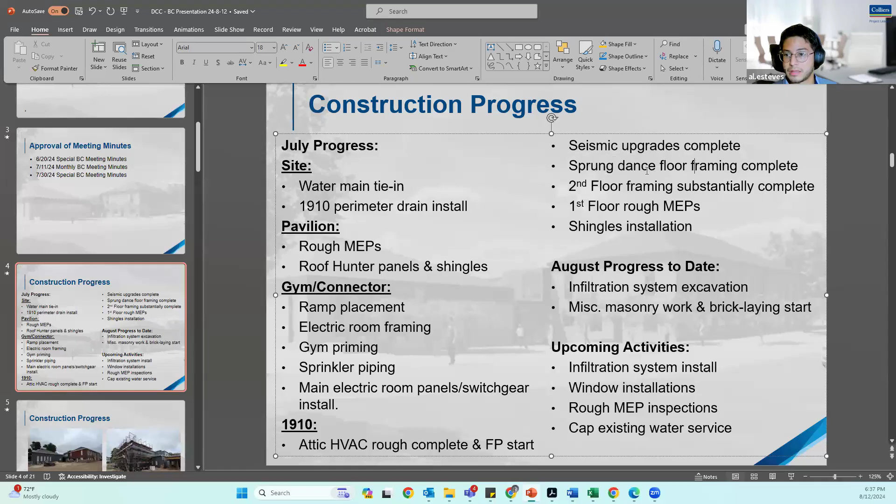A big milestone for the month of July was completing the seismic upgrades at the 1910 building. That opened up a lot of work with the floor framing and general framing and rough MEPs start. We completed the sprung dance floor framing during the month of July. Second floor framing is substantially complete at this point, and the first floor rough MEPs are also substantially complete. Shingles at the 1910 building are substantially complete as well. So a lot of progress in the month of July.

It is now the 12th, and since the end of the month, we've started excavation for the infiltration system. I actually saw that yesterday, and they have all of the piping installed, and it's getting backfilled. So that's going to be complete this week. And another big one is we're restarting the masonry work. Currently, they're working at the gym building, laying brick. Upcoming activities are, like I mentioned, completion of the infiltration system this week, window installations, MEP inspections, as well as capping the existing water service. Any questions on the progress?

Are we going to get into the overall schedule in a minute? We are. Okay, yes, thank you.

Okay, so looking at some photos, the picture on the left, this is taken last Tuesday, and you can see on the pavilion building the shingles, which are about 50% complete. And you can sort of see some of the repointing that picked up again on the 1910 building. As I mentioned, picture on the right at the gym building, they're starting back up with the brick. As you can see, all the brick is staged here. Right now, they're probably about 4 foot higher than was shown in this picture. So we had some progress since last Tuesday.

Going inside the pavilion building, towards the beginning of July, they started the ductwork up in the kitchen area, and that's now being completed. A picture on the right shows the installation of the ductwork as of last Tuesday. That's all complete now.

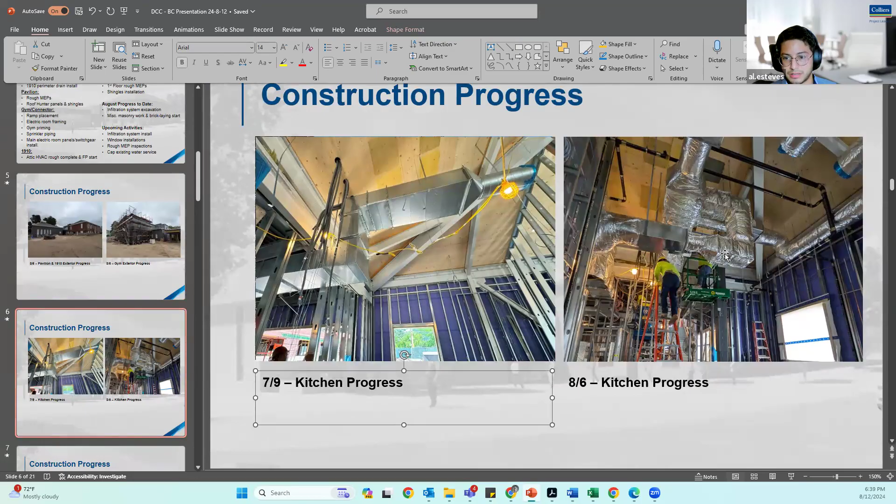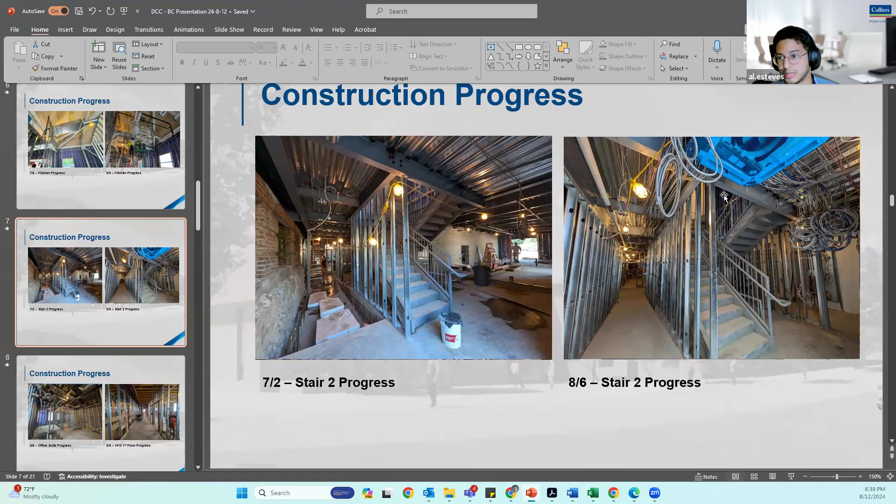Moving on to stair number 2. This is by the electric room. Picture on the left is what it looked like in the beginning of July. As you can see, the ramp had not been installed yet. Very little electrical wiring. And you can see in the picture on the right, ramp is in, framing is in. You can actually see a fan coil unit up at the top, a bunch of wiring to the right. And in the back, you can sort of see some of the panels installed in the electric room.

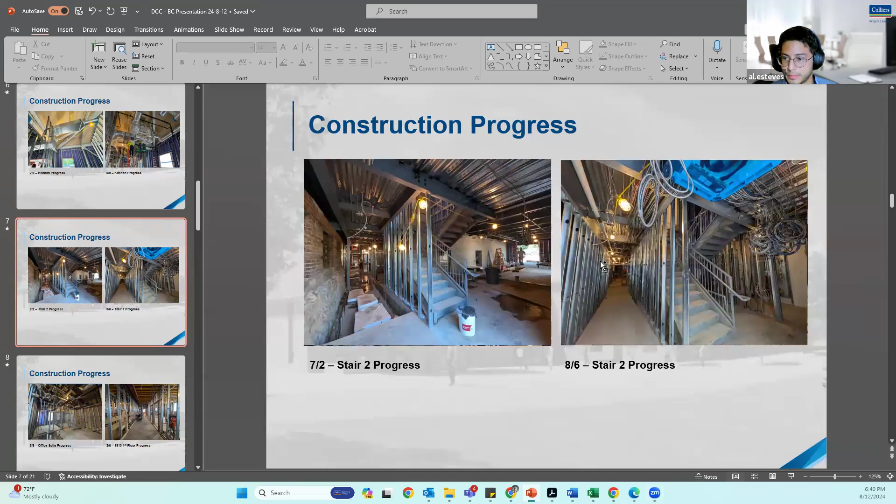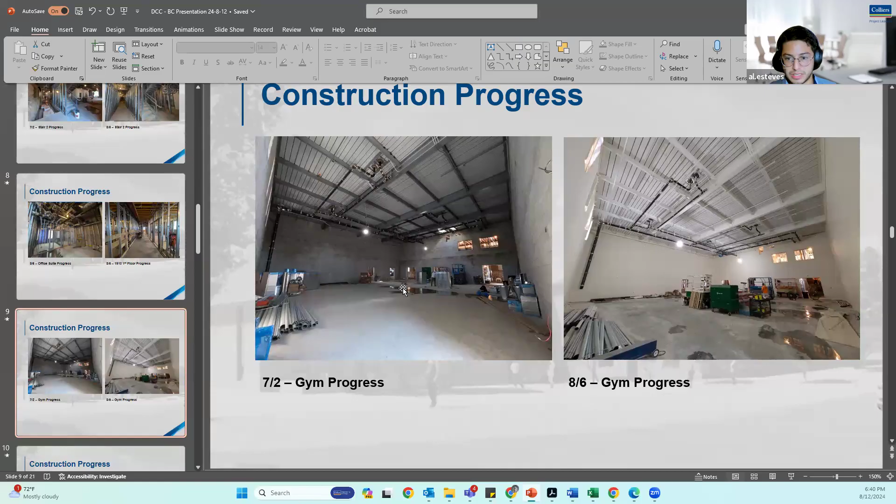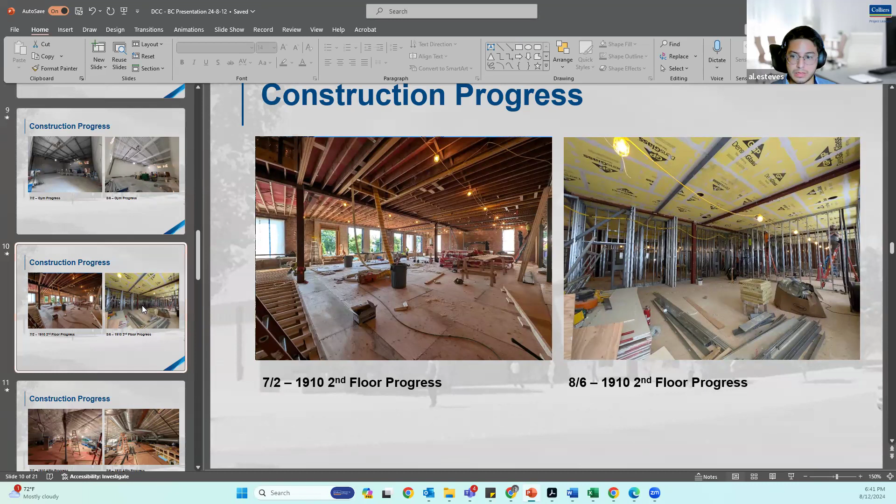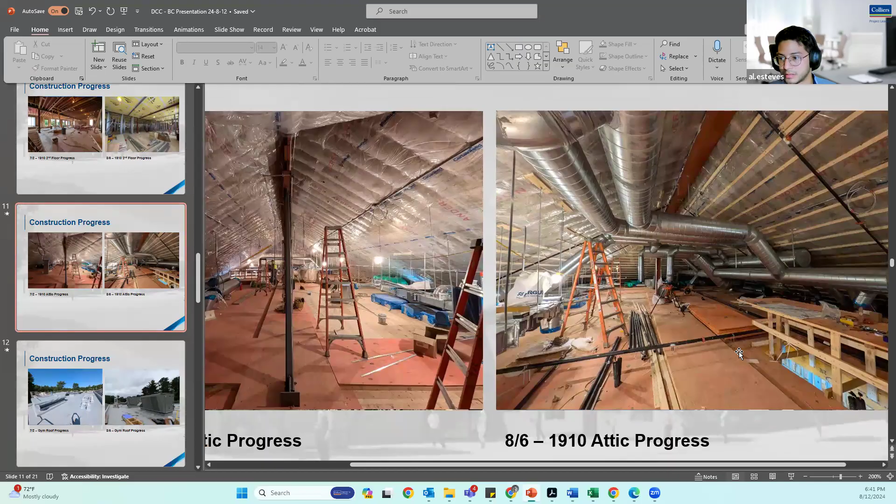Moving up to the attic of the 1910 building, picture on the left is the beginning of the month. You can see some of the ductwork and fan coil units had started to be hung here. And the picture on the right shows all of the round ductwork is in. You can see some of the strapping for the vapor retarder. And then you can see the sprinkler piping that is up and also laid on the floor. So that was ongoing as of last Tuesday.

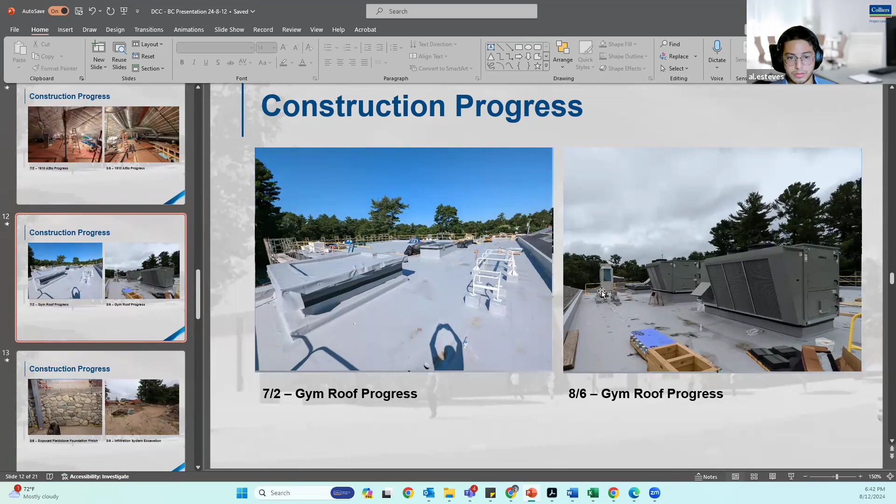Moving up to the roof of the gym, you can see that the rooftop units were installed. Those were inspected today by the town's third-party MEP commissioning agent. That's R.W. Sullivan. And then you can see another condensing unit here in the back.

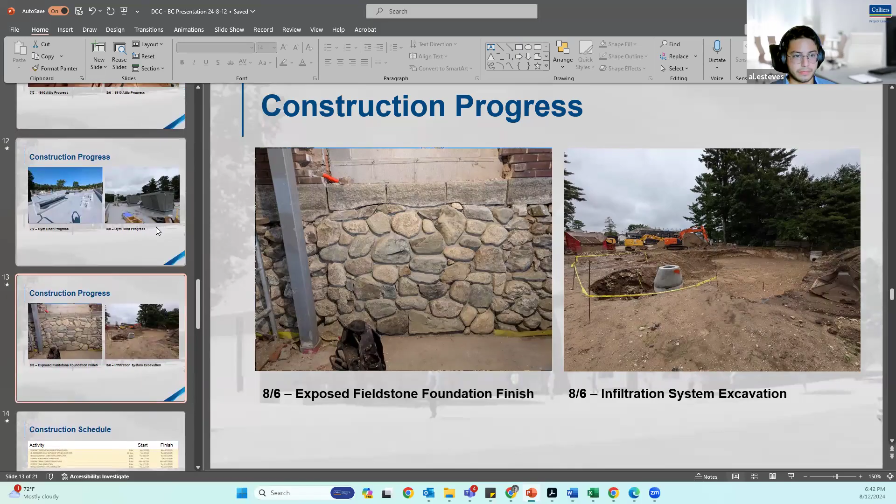Okay, moving on to the construction schedule, I do have a couple of updates on this. We received an updated construction schedule today that shows that the contractor is anticipating achieving substantial completion at the beginning of January of next year. So this is 3 months behind their current contractual substantial completion date, and it is about a month more than what they were showing in their last schedule, which was from May of this year.

Obviously, we'll continue to work with the town's legal counsel on this. I've already notified them about this updated schedule. And we were already withholding a total of $88,500 from the contractor until a formal delay claim and a corrective plan is provided.

Those have not been provided yet, so we continue to hold that amount. And essentially, because the contractor is now showing that they are more behind schedule than before, potentially this increases the amount that we can hold back from the contractor. This is something that I am working with town's legal counsel on. And again, the schedule, we just received it today. I haven't had a chance to go into it in detail, but these are the major milestones.

And you can see here in the middle where my cursor is, January 7, 2025 for substantial completion. And this is when the building can be turned over to the town. We would have the certificate of occupancy at that point. And then final completion, when all the punch work is done, is February 11, 2025.

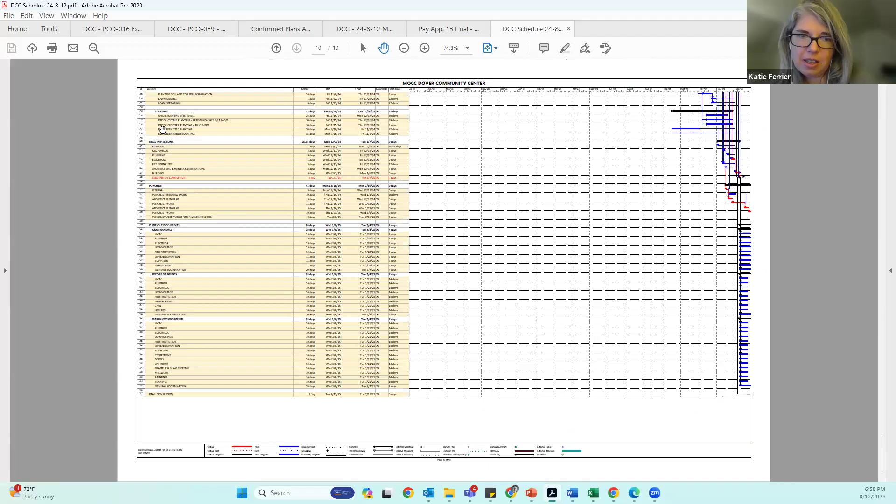As you said before, the masonry is going now — I think in a month from now the mason could be off-site. Once they get started and have the manpower, I doubt it. No, fair, fair — masonry's going to be slow.

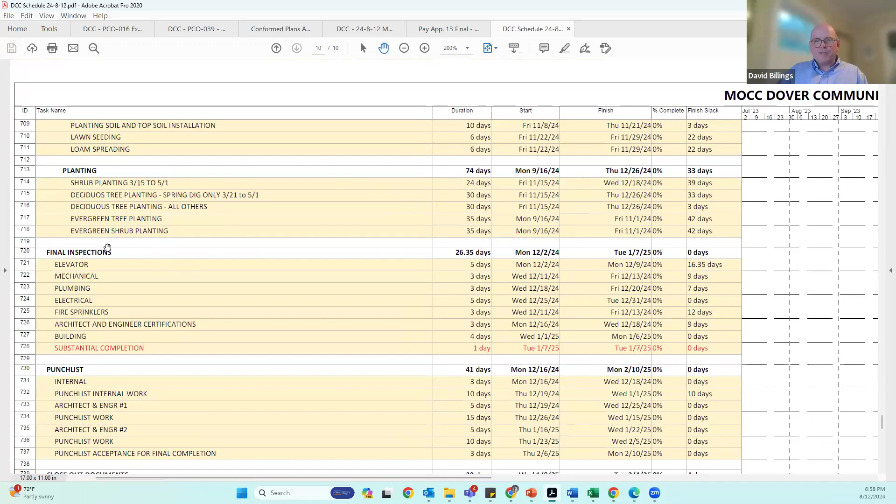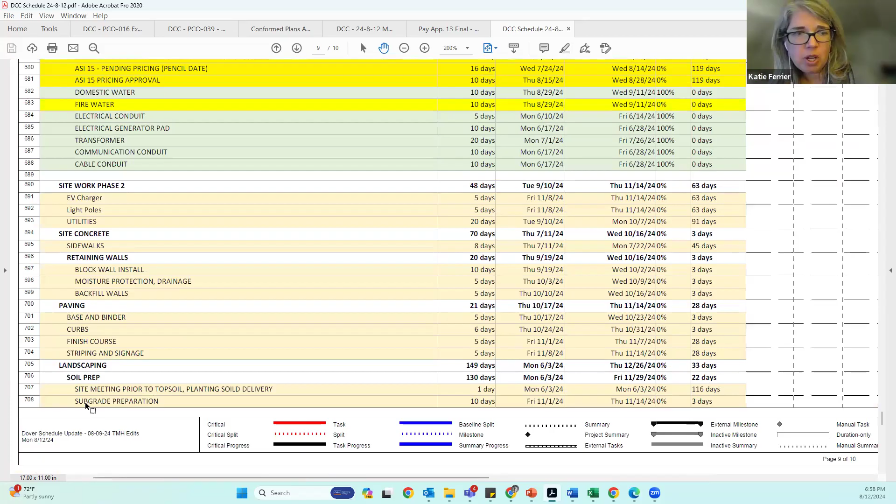I'm not worried about cold weather conditions in September, because I think it's about getting the envelope done. It's realistic to look at some of the plantings as a game-day decision — say, October 15th, are they going in today or not? And then it becomes a spring 2025 conversation. There may be several contingency plans for the landscaping.

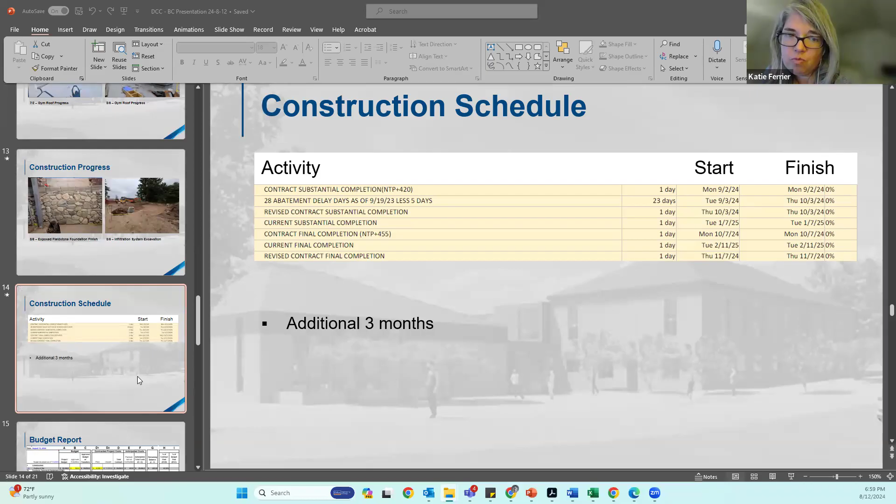For the balance of the site, we've got lots of hard surface — fencing, play equipment, other things — which I think makes more sense to push on, since there's no difference there. I'm not worried about the plants; I'm worried about the paving, the sidewalks, all the hardscape, getting the site basically to grade.

And they can't do that until the masonry's done and they take the scaffolding down and clean it up. The site's a mess right now — it really is, it's not very well organized. They've got a lot of work to do in the next two months.

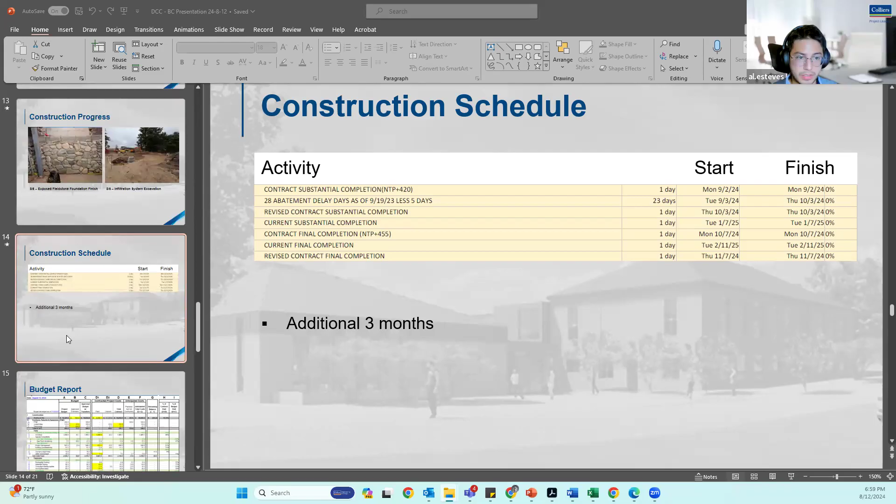We'll continue to track this and work with town legal counsel on next steps, and of course keep you all updated on how that's going.

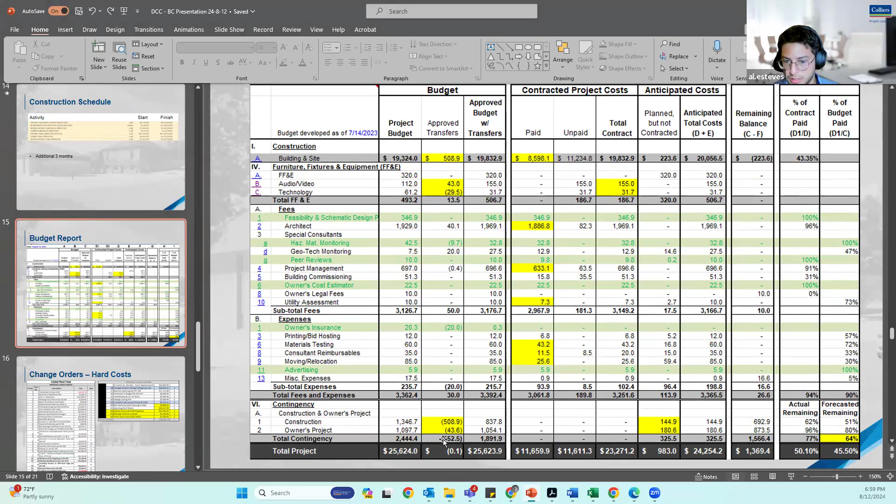Moving on to the budget. I highlighted in yellow the changes from last month. We had a couple of transfers — this is looking at column B as a result of the approved change orders and also vendor contracts for retrofit and AV. Those are again highlighted in column B.

I'll go over the invoices in column D1. Our potential exposure on the project is around $325,000 — $145,000 of that is for construction and $180,000 in soft costs. I'll go over what those are in the next couple of slides. Worst case scenario, if all of these potential exposures were approved as presented, we're looking at a remaining project contingency of around 64%, or $1.89 million.

I'm sorry, 1.566 million - reading at the wrong line.

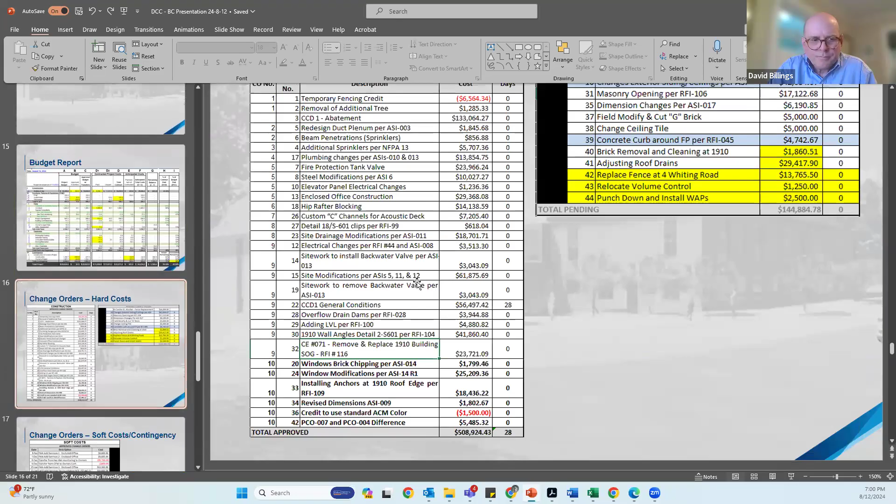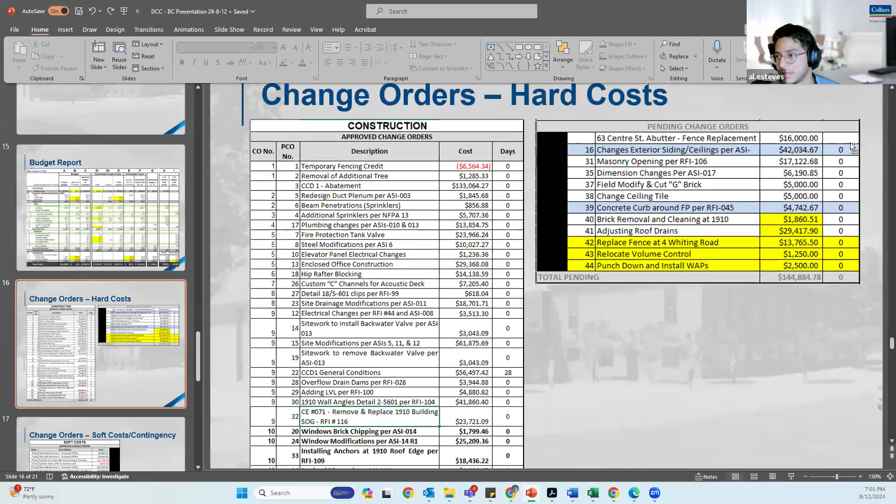Okay, so looking in more detail, the approved change orders are on the left. I'm capturing the ones that were approved during the last month. Looking at the right at the potential change orders, there are two I want to present for approval recommendation. One of them is PCO number 16 for exterior changes, siding and ceilings.

It's misleading. These costs came about from the town's third-party building envelope commissioning agent's review of the drawings and details. They offered a number of recommendations to make the building's exterior wall and roof assemblies better performing, more efficient, and longer lasting.

One example is minimizing thermal bridging. Thermal bridging is essentially the loss of heat during the wintertime, or too much heat gain during the summertime. And the PCO includes costs for waterproofing, insulation, framing, and roofing subcontractors.

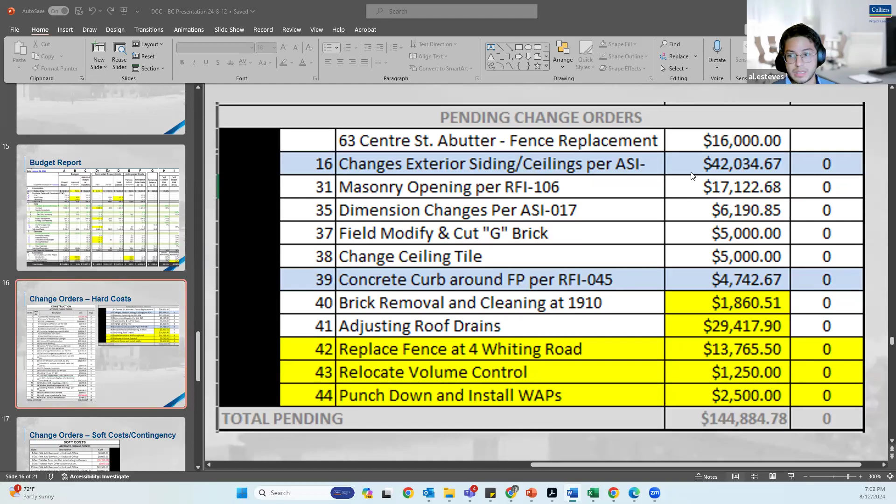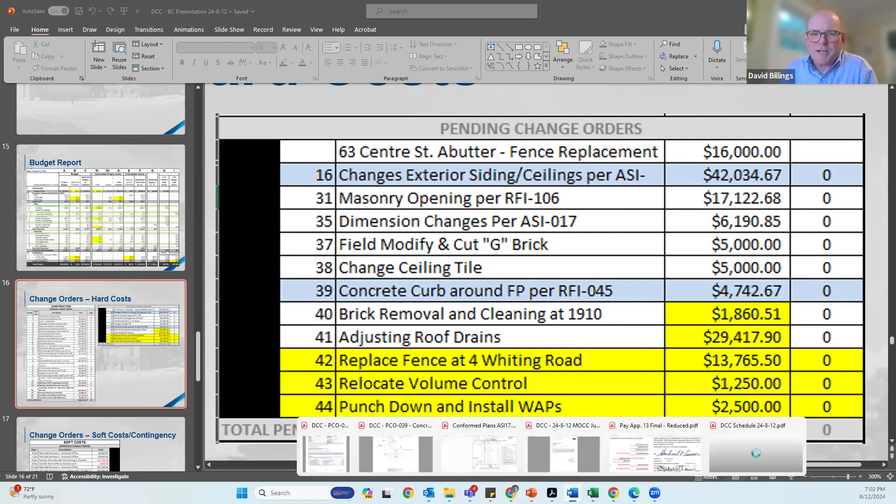Is this to the exterior soffits? That's part of it. Yeah, are we changing material, or are we just adding flashings and so on?

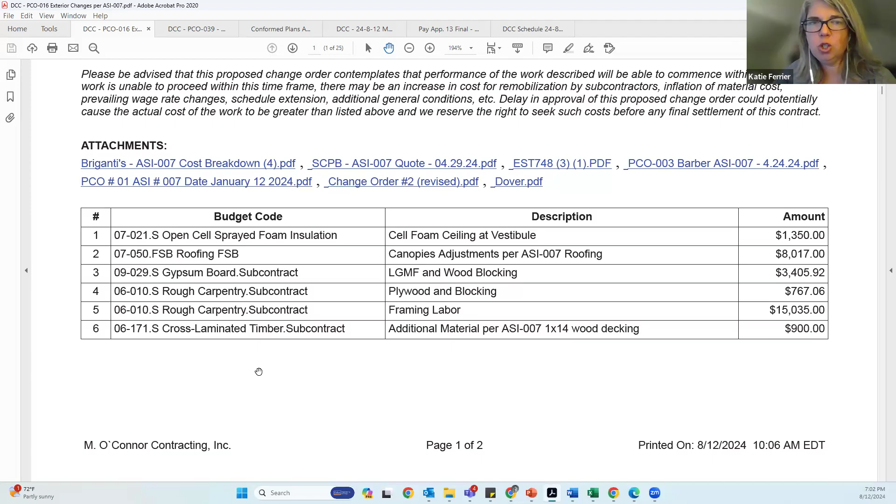In general, the only change in material had to do with open cell insulation within the canopy. Al, I'm not sure if you have any of the drawings or commentary that might be helpful to flip through so you can see what we're actually touching. Yeah, I have it open.

Okay, so we'll start at the top. At the light monitor, for example, some of that was just detailing really to minimize that scope, so that we're keeping the heat in and not getting cold points at the glass.

So to answer your question, it's really more detailing than changes in material. We still have this wood decking outside - we have the CLT roof slab, that's the roof structure. But instead of it extending about a foot out, which would be a thermal bridge because it's a continuous piece of material, it got pulled back.

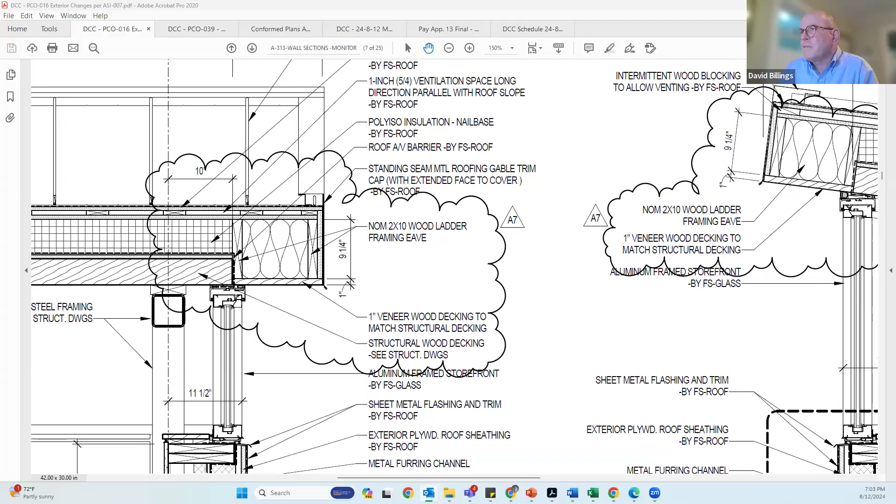So what we're creating is a false wood piece. When you drive by, it should look like CLT because it will be wrapped in the CLT, the same material. But it is a false piece - we'll never really perceive it.

I'm more worried about the durability of a little piece of wood sticking out there in that direction. It's basically this is a box beam, we call it a wood ladder.

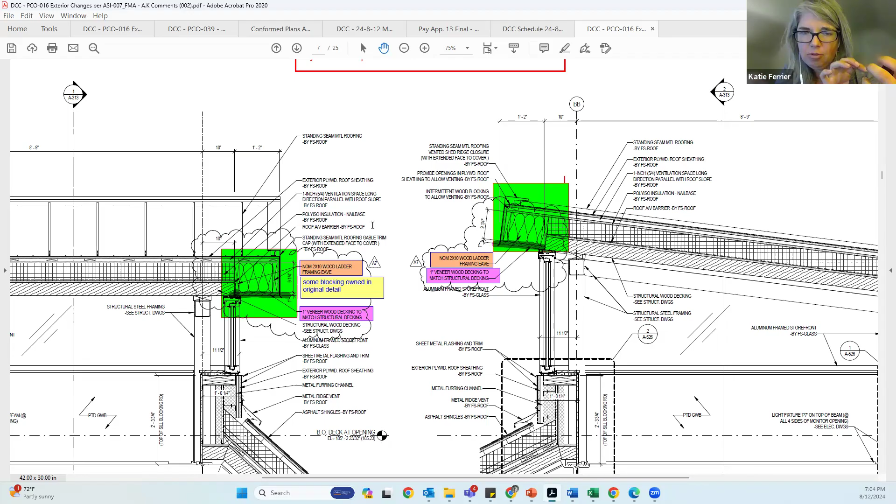So the framing is coming out, it's being filled with insulation, and then we still have the roofing going around and it's being wrapped on all sides. So that in and of itself is a box beam that's just being attached to the roof structure.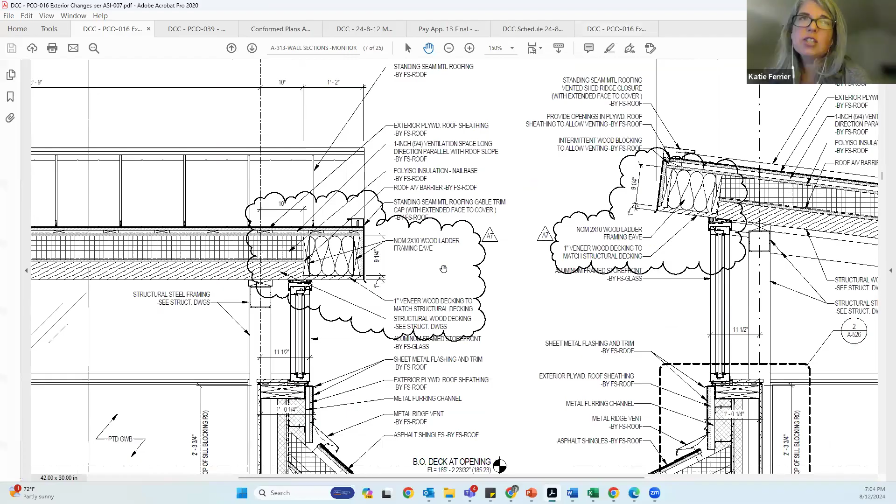No, I understand it structurally, I'm talking about the durability of the wood finish. On the other side, because that's exposed - what kind of wood is it? Is it real wood or is it composite? It's real wood, the same wood that is sourced for the CLT ceiling.

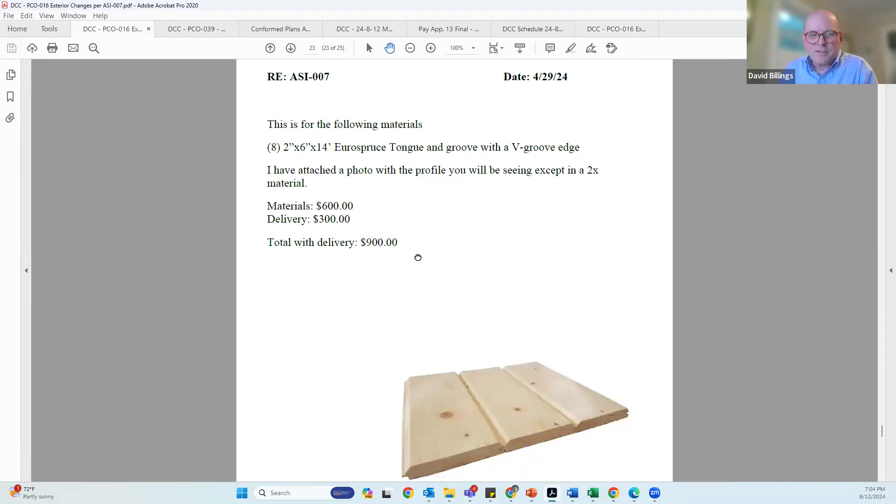So it's European spruce. That's not going to survive very long on an exterior. That's going to just rot, I can promise you.

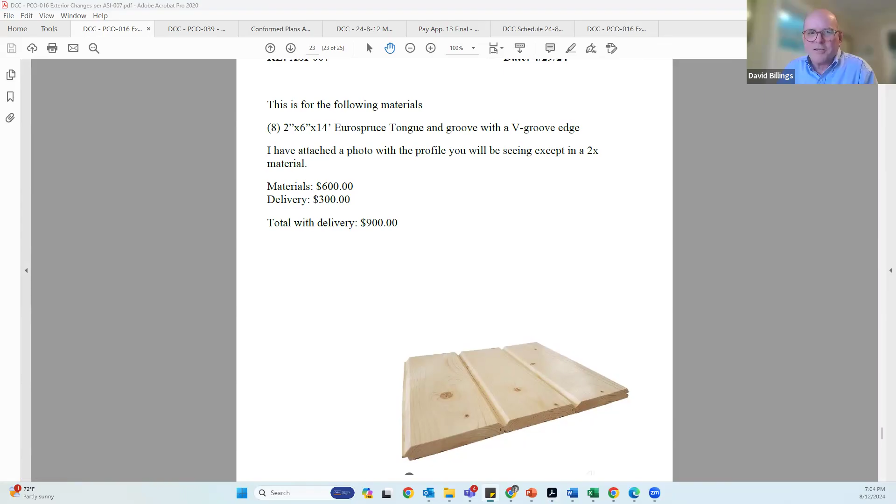CLT is usually not good for exterior use. I've built buildings with CLT - it's not good exposed to water. You don't want spruce exposed to water.

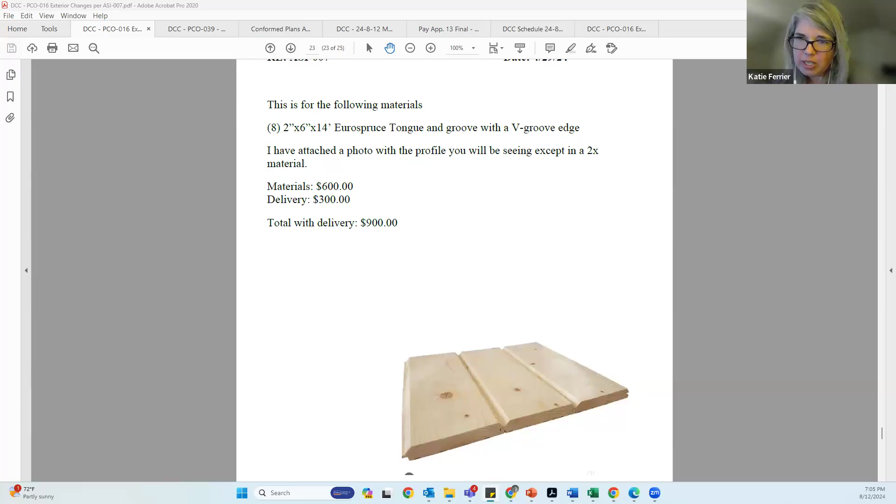What we have called here is, if this would be sealed as you would any other exterior wood element for exterior application.

Is there any reason why you couldn't use PVC? We do have some other PVC on the project. I think most of that is painted because it's near the windows.

I think in this area I'd be more inclined to maybe wrap that with metal, because what you're seeing there is the standing seam metal roof, which covers two sides. And we have other brake metal flashing back in different places, and wrap it around - or do basically a fake wood. I can't do that.

Real wood is just not practical here, we'd be ripping it off in 4 years to replace it. Following what you're saying - yes, there are many products intended to go outside, and it's a composite, a fake wood. It's PVC effectively, or something similar, which is fine because it looks similar and that would be the recommendation. Because we're never gonna get back up there and it's gonna look gray.

We are not including a lift as part of this project, and there's no ladder up to this part. So in the sense of maintenance, or someone going up there, you're totally right - minimizing the need to touch this up makes a lot of sense. Thanks, Katie, for adding to my maintenance list.

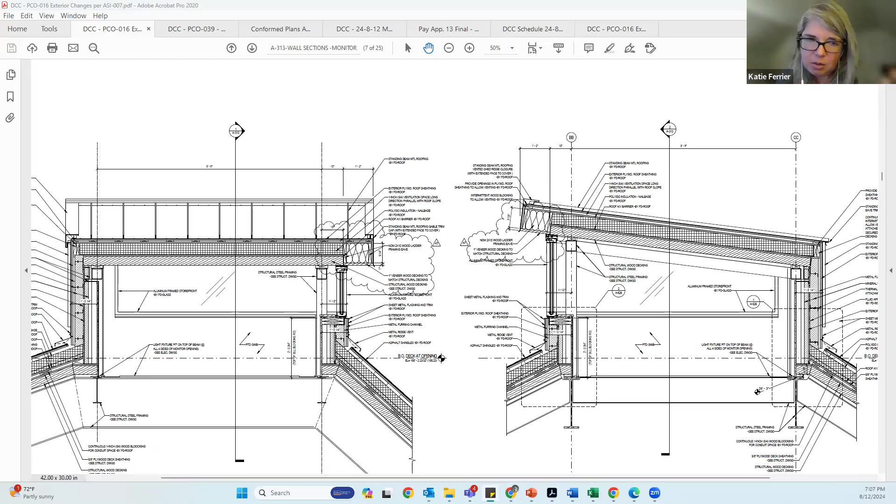You're using PVC in other areas of the building - at the windows in the 1910 building, where there's new windows there is some PVC trim. That, you know, because it's an existing window opening. This is a stupid question, but I have to ask it: painting PVC is a maintenance headache. You cannot get PVC in the color that you guys chose?

I'm guessing. I would bet $5 that we can't get PVC in the color that we chose.

I will also say that what we owed was for the painter to paint the PVC - that's part of the scope. We also haven't been submitted something that says, here's what Hardie or somebody else makes, here's your 6 colors. So I guess I should say we haven't had that conversation. I haven't looked at selectors.

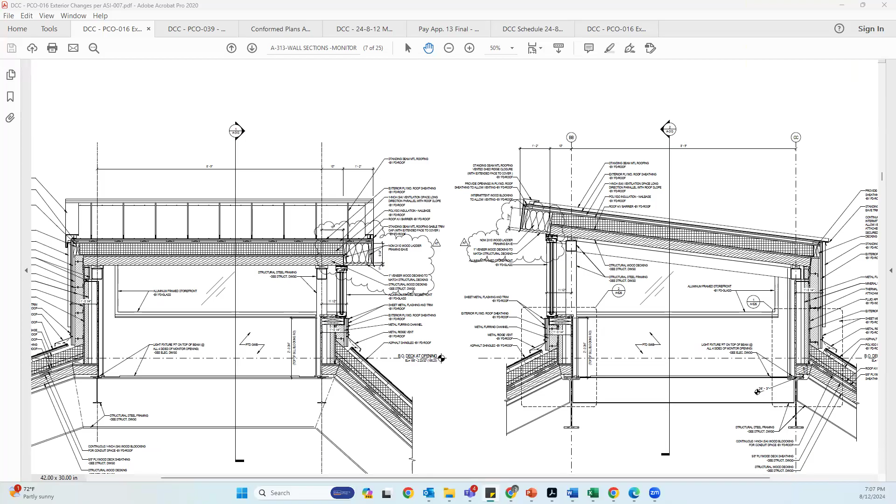The intent of the trim is to match the fiberglass windows. And the fiberglass windows, obviously, are a different manufacturer, different material. Yes, I understand all that. Okay, that question hasn't come up. So I'm following what you're saying - we haven't actually even talked about the trim yet in the project, so I'm not sure what the plan is. Good, so we can talk then.

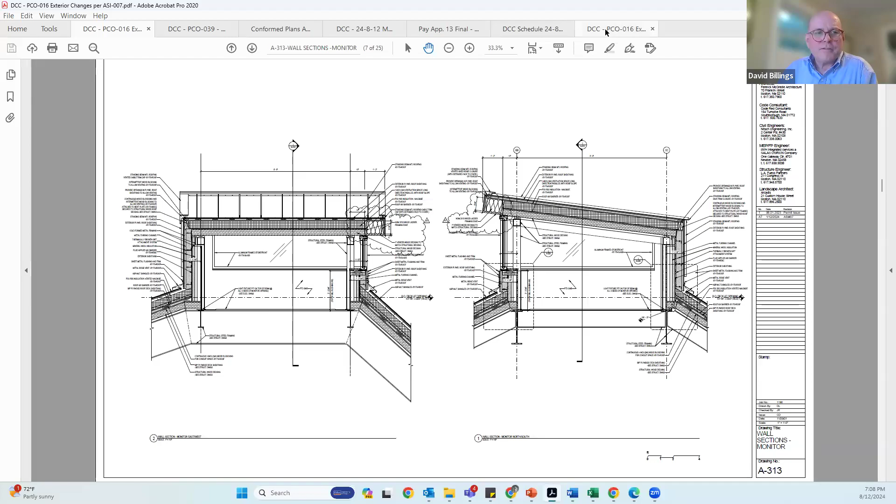Add that to my submittal list. Do we have any other real wood exposed outside? No, we have HardiePlank. We've got some other areas in the building, but that is also getting painted. That's underneath the canopy - yeah, it's HardiePlank, or cementitious plank. Yeah, okay.

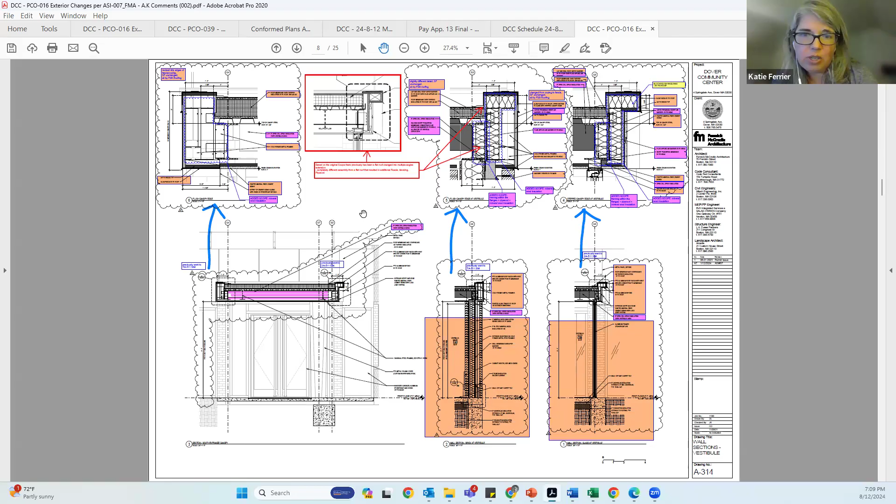So at the canopy there's some adjustments of detailing I was looking at. The reason Al is showing this is FM went through and highlighted it. We've reviewed with Colliers as well, really just to look at this at a high level - say what's neutral, what hasn't changed, what's an add, and what's a minus. Because as we're vetting and reviewing this, we want to make sure we're getting all the scope captured, and primarily if there's a credit we need to be pushing back on or making sure is being captured. So as part of this process, MOCC did come back and respond to the questions about where scope was coming from.

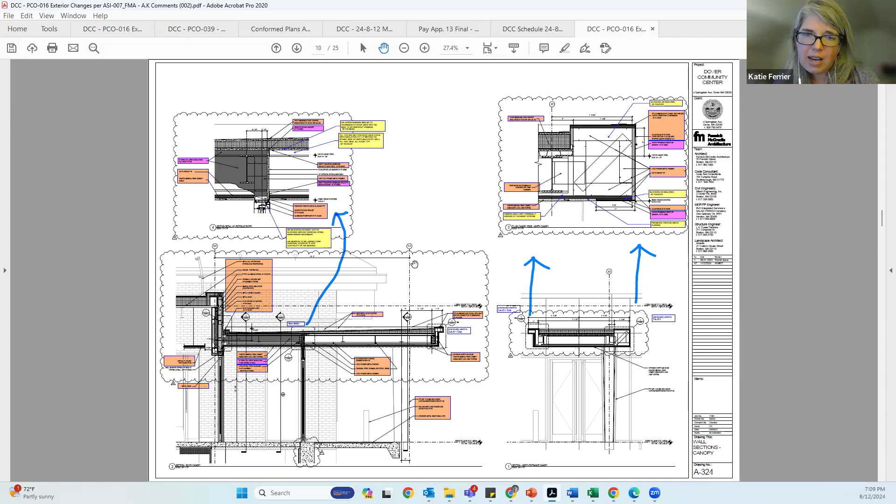So in general, if you look at these pages, there's not a lot of yellow, which is what I was calling out as credits. If you look in the backup there is some - it's $30 from the roofer, and there's some things being adjusted, but for the most part we're adding scope. There is more framing, there is more blocking or plywood in order to create a cleaner surface for the AVB or whatever to go to. So at a high level, as Al said, it's a better envelope system, and that's the betterment.

And this is coming from Thrive? Correct, yes. Okay, all right.

So that's PCO 16. The next one that I wanted to present to the building committee tonight is PCO number 39, concrete curb around the fire protection tank vault. For RFI 45, that's $4,700. And that basically captures the cost with a new concrete curb that was needed around the pump tank. And it is to support a cap, essentially a concrete slab that is about 3,500 pounds that needs to sit

on top of that. Now, what's important to note is that the fire protection system on this project, as you all know, is a custom system, and we needed to have that to support the fire suppression systems for the project. There's not enough capacity in the main lines, and so this being a custom system, the structural requirements for this tank were something that wasn't known during design. During the submittal process, it was determined that they needed to have a bigger slab that's a lot heavier, and therefore we needed to have those curbs around the tank.

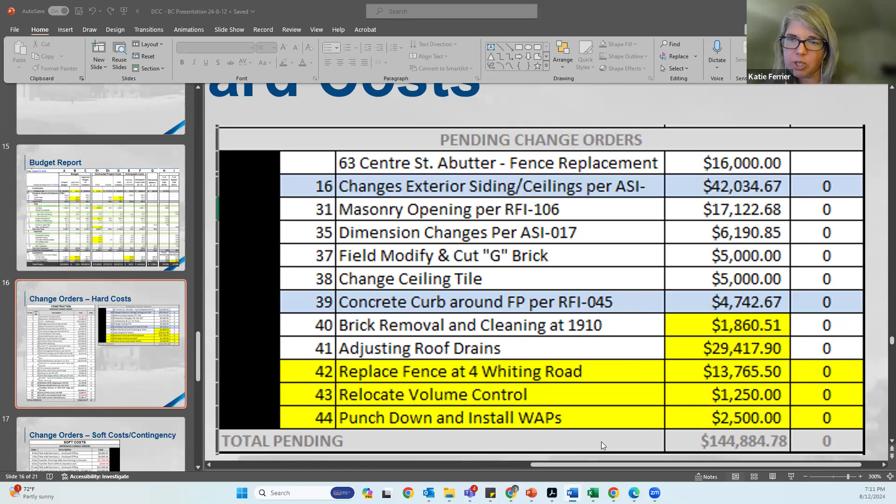Katie, let me know if that sounded okay. Yeah, I think Al, you've captured the scope of this. If it's helpful, you can kind of flip through the sketches. So the fire protection sub owns the precast cap or lid. And if you go to the very last page, you'll see, so we're calling it a cap as if it's like a tiny little thing. It's 6'8" in diameter. And if you scroll down to the bottom, I think it says the weight, it's close to, there we go, 3,440 pounds.

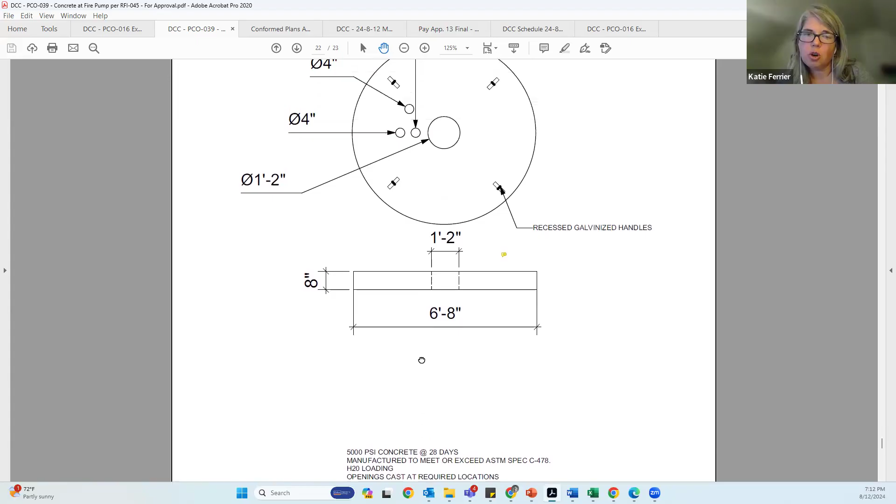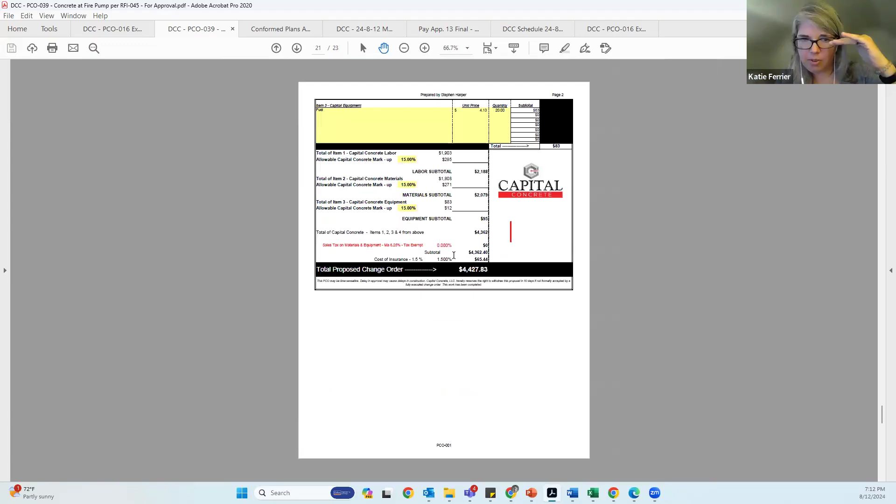So the size of this is large, it's 8 inches tall. The holes that you see there are set up for, first of all, some lugs to be able to lift this, and then a series of pipes that will be going through connecting the pump to the tanks below. And the tanks are very, very deep and about 4 feet in diameter, but they're not strong enough to support the pump. So they do need to be connected together, but it's not as if the tank supports the pump.

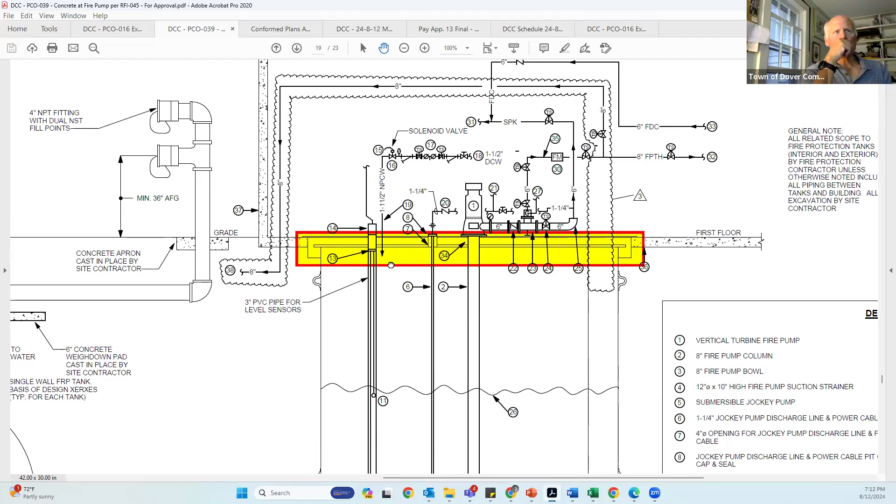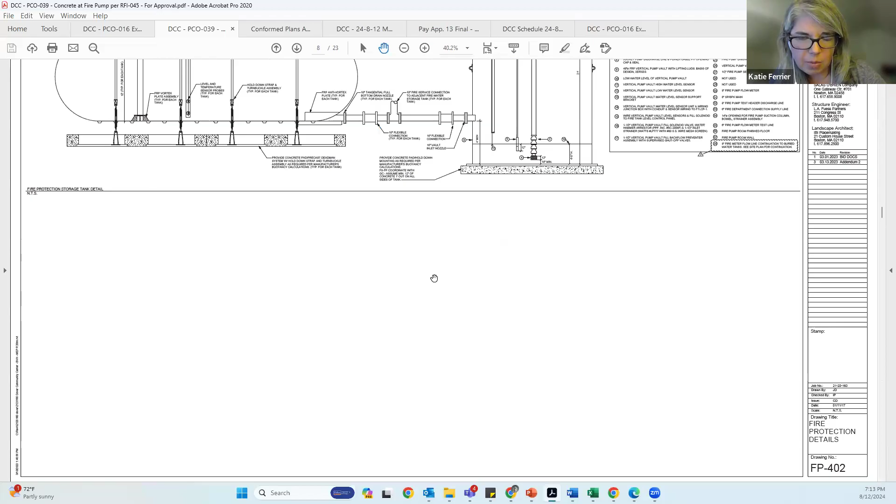So this cap, and what you're seeing in here in yellow, which is a highlight of the drawings, is actually going to sit on top of the slab. So there's a structural slab, there's a very short wall, just a knee wall, and then the cap sits on top of that. Is that knee wall down 4 feet below frost? Knee wall down 4 feet? No, the knee wall is part of, if you can flip it to a different page, Al, there's a section of the slab. Oh, there you go, right there.

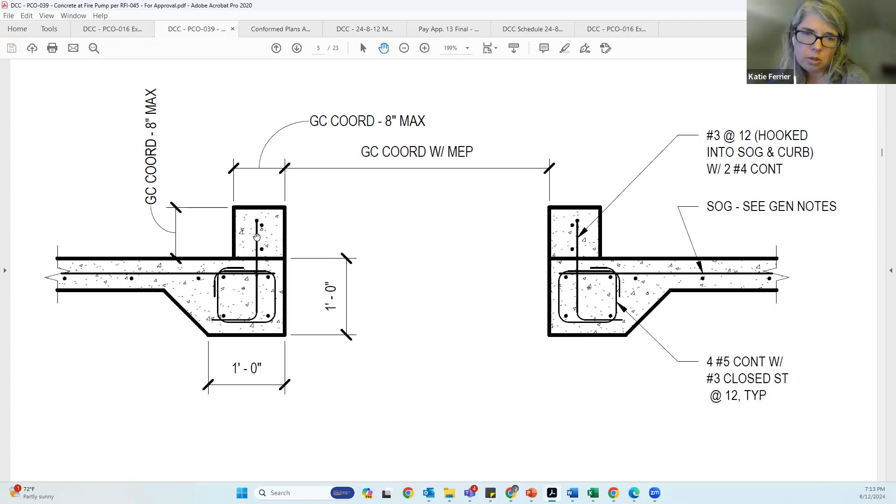So Carl, when the slab was poured, there was a structural haunch at the edge. So in the middle where it says GC coordinate, that's a little over 5 feet wide, because the tank is a certain dimension, but there's also ancillary pieces. So the slab was poured, you can see the haunches on the side. And so the knee wall is tied into it, but it's not a footer. It's not a foundation wall. How far away is the curbing from the cap? So what you see right here, the cap will sit on top of this. Yes, but how far from the tank cover is the concrete curbing?

Oh, so the tank fits in between this. The tank is 4 feet. There was a flange around that, and then there was a little bit of space between the tank and the. Thank you, Al. This is fantastic. I've got some details for you to draw. Yeah, I get that part. But how far away is the concrete berm that you're proposing to do? Because it's only a berm, that's not gonna be structural. To be structural, you gotta go down 4 feet.

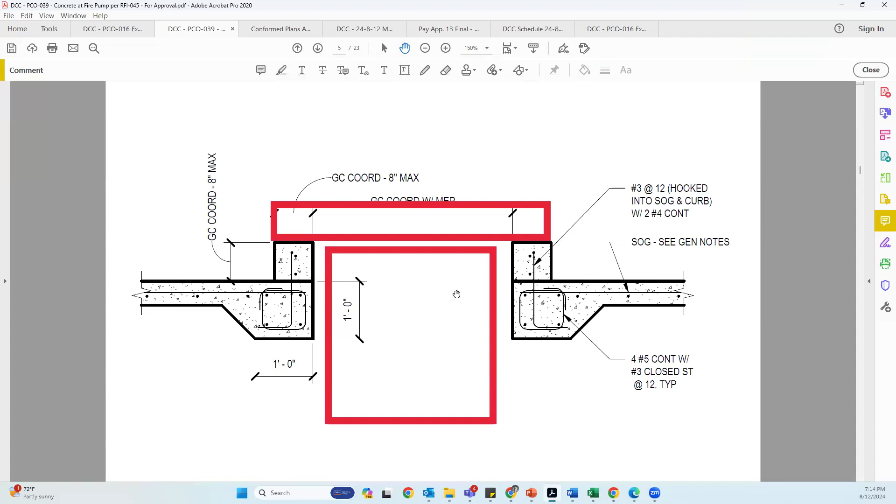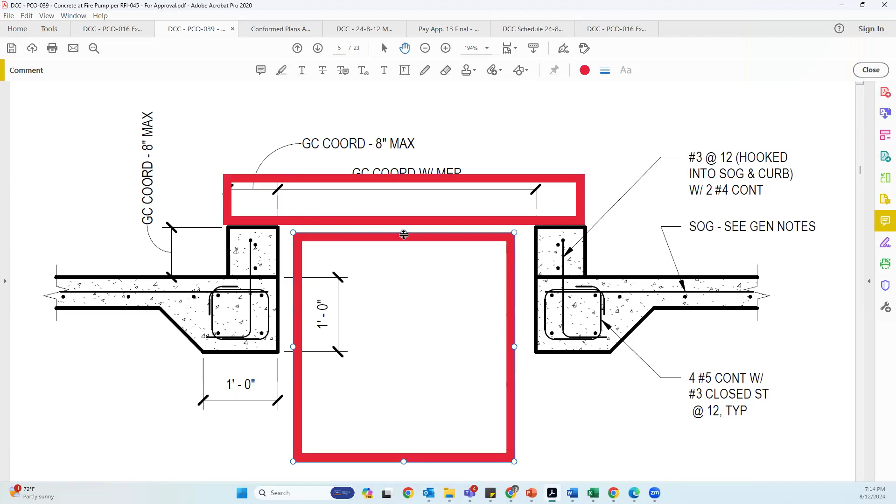So I was saying a structural haunch, basically the opening in the slab. It's fattened up at the edges, so we can tie in the rebar. Structurally, what we need to do is to lift the cap up so that there is an airspace between the cap and the tank. I get that. So where Al has drawn, the top of the tank is going to be in line with the floor or even lower than that. So there will be an airspace between. Yeah, thank you, I get that part.

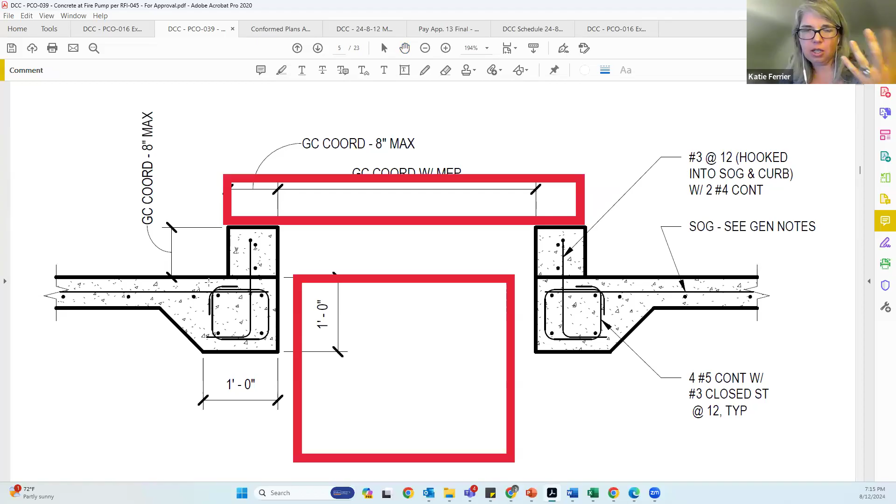Okay, I'm sorry, I'm not catching your question. Which dimension are you interested in? The change order for $5,000 for the curbing, where is that curbing? Okay, so it's what you're seeing right here. So it's a curb in the sense of it's this concrete scope.

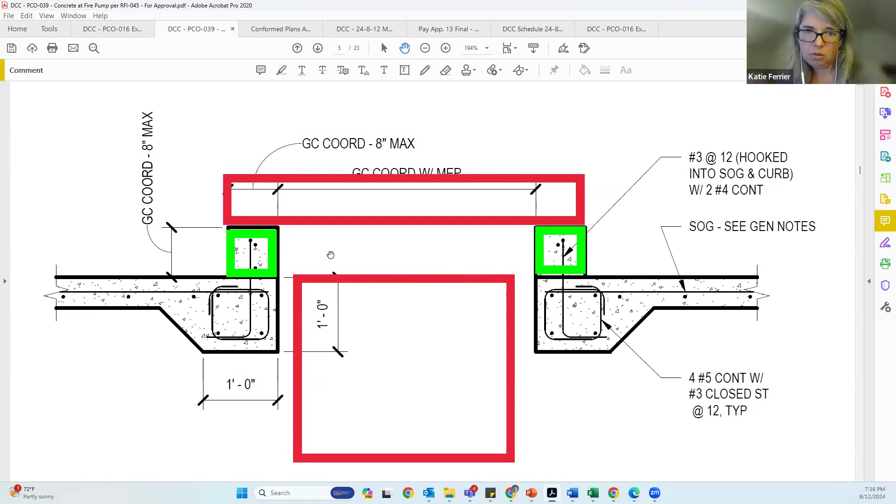And so it's a curb, but this is a section cut through it, so it's actually a circle. The second part is the haunch below, so it's a fattened slab. I forget if this is a 5-inch slab, something like that. So the additional area here is amending what would be a more traditional, simpler slab. So adding in this haunch and boxing out both the larger space as well as adding this little knee wall, in the sense of just lifting it up above the floor slab.

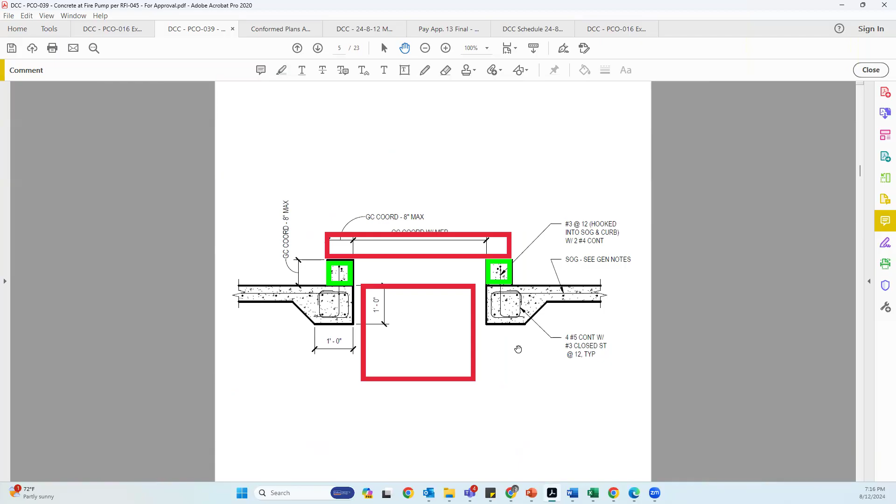Oh, okay. Yeah, I was thinking of the 4-foot frost heaves. Okay, got it. 'Cause you're not gaining anything from that as far as structural to hold that cover up. No, so this is a slab on grade. Maybe I should have started by saying that. It's interior. Yeah, makes more sense.

Cause I know when we put that above ground tank, we had to put knee walls to support the tank, the existing oil tank, because it was pushing against the foundation and the stairs that were going down. Okay. So yeah, the vertical push. Oh, interesting. I'm thinking curbing, like parking lot curbing. Yep, got it. Sorry.

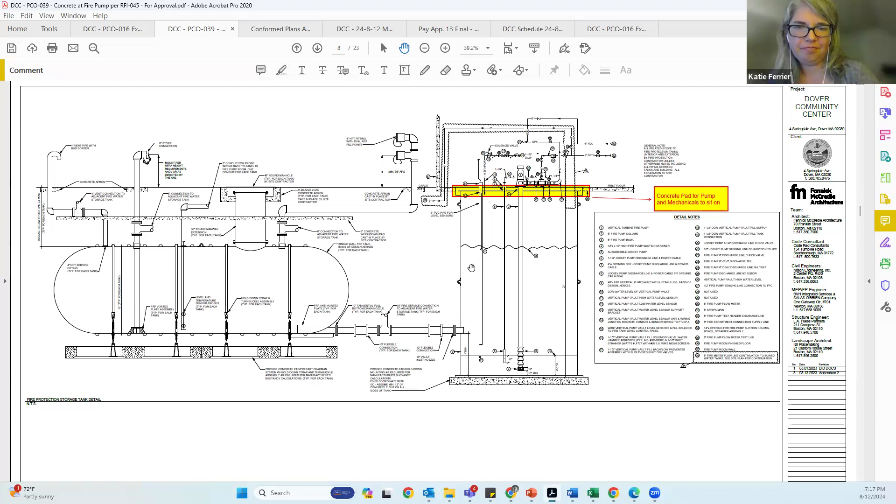So this is all just to support the pump, the fire pump? The tank cover. The tank is below, the pump is above, and they have to work together, but the pump can't physically sit on the tank. So yes, David, this is to support, and the pump is heavy. I don't have that weight in my head, but it also needs to be stable.

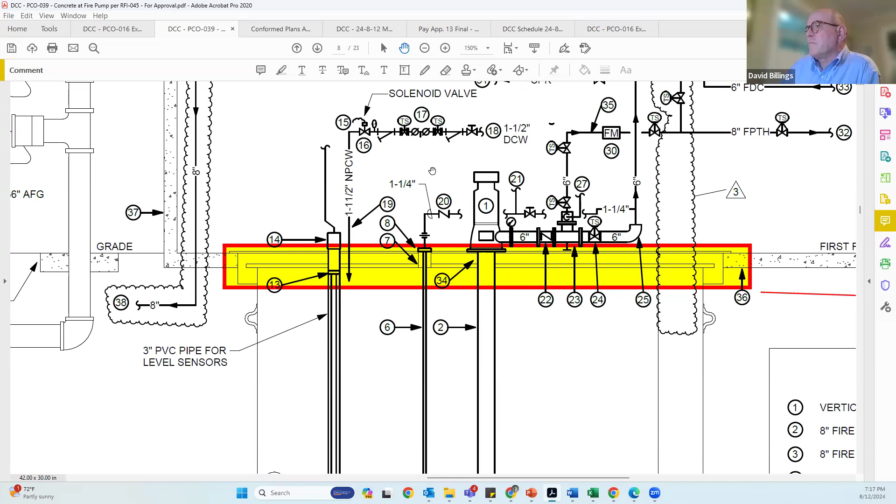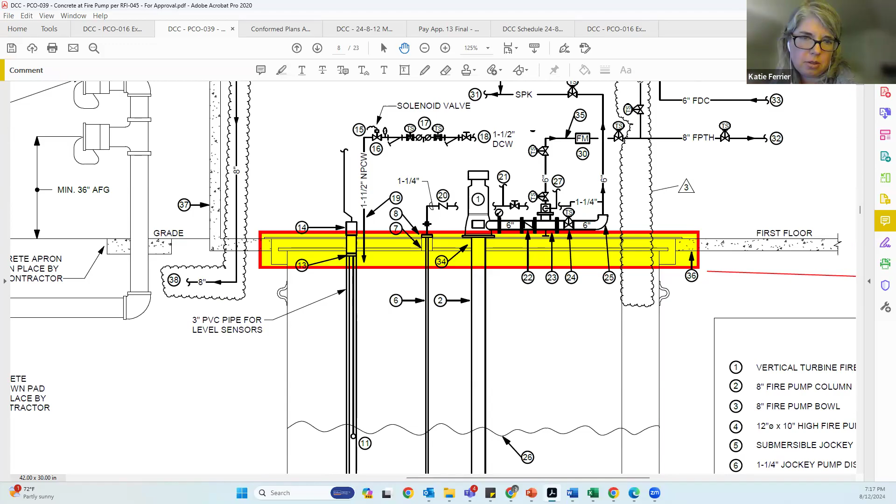Fire pumps, yeah, usually they're on a housekeeping pad. Exactly, and that's what this is. It's effectively another housekeeping pad. It's almost as if the pad is being provided by fire protection. We had to create a shim, if you will, to put that pad on. Alright, to support the weight of the pad. Exactly. Alright, okay.

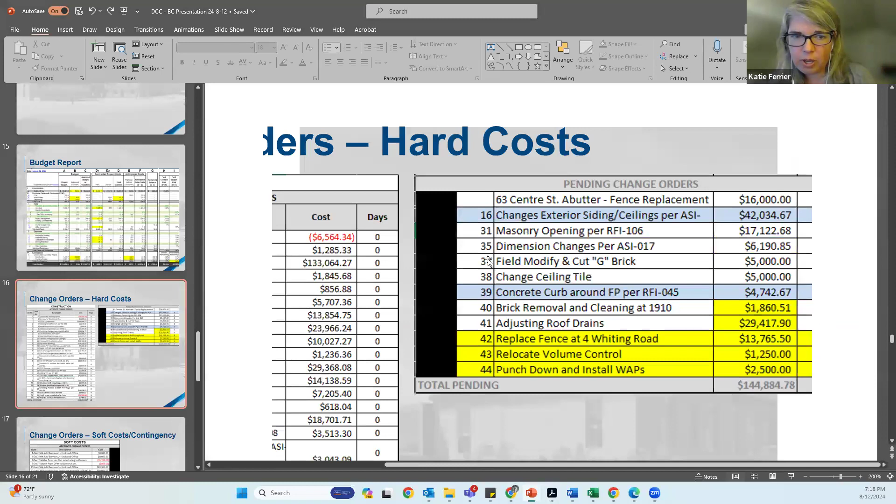I will finish by saying almost everyone in this project I've talked to said they have never worked on a project with a fire pump and tank like this. So we're hoping to take lessons learned. How old are all these fire pumps? Only in Dover. Well, I haven't had tanks like this, but I have lots of fire pumps. Yeah, I should say more specifically the tank, because the pump just goes on a slab on grade. So you've got something unique here, and we'll be sharing these lessons around.

So Katie, the reason why this wasn't captured in the original documents? So there's a number of things. Primarily it's coordination of the product that was submitted and approved. Like anything, there's always deviation from basis of design and being open to non-proprietary systems. What we realize is something that's just slightly more robust. Structurally, we needed something that was really going to support this pump and make sure that we weren't allowing them to touch each other and really separate them. So that's why this is 8 inches as opposed to something shallower, but really they needed to be distinct and separate, so there wasn't any kind of friction that would allow them to rub together.

Thank you. And related to this, not quite to answer your question, Dick, immediately above this we have a roof hatch. The only reason we had that roof hatch in that spot is for the future, 20, 30 plus years from now. If that has to be removed, it's located directly above, so that can come out. We want to make sure that we're not in a situation where something is rubbing and then you have to pull that out and replace it. So I would say structurally, we maybe leaned a little bit to do some belt and suspenders, to make sure that this was more than adequate. Okay.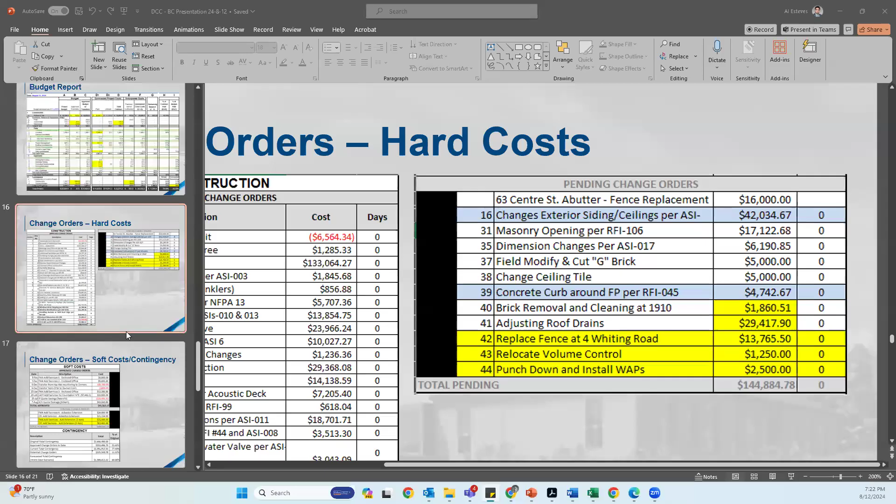On change order 16, we're still gonna make some adjustments to the exterior finish material, so it could be changed in the future. Or we'll get another PCO for that change. So yeah, let's approve what we got and we'll deal with the other issue later. So motion to approve. Okay, second. Okay, I'll poll the committee for all those in favor. David, yes. Barry, yes. Luciana, yes. And I am a yes as well. Thank you.

Great. There's three other PCOs that actually we don't even have the PCOs, but these are items that I am tracking that we're waiting on pricing from the contractor. We have the fence replacement at 4 Whiting Road to go from a chain link to a 6-foot wood fence. We have a unit price in the contract for that. Waiting on the PCO, and we had a couple other changes from the audiovisual and also the data meetings that we've had. These are a couple of changes that we're waiting on. Can I make a comment on that? Go ahead, Carl.

The abutter is not looking for a wood fence. He's looking for a chain link with the slats that they slide in. I thought that was around the generator, not his property line. I thought we decided to do a wood fence along the property line. It was scheduled to replace the present chain link fence along his property. Yes, and I thought we upgraded it to a higher one. But according to the resident, he does not want to see a wooden fence. More the chain link with a screen in it. I'm just bringing that up, that's all. That's fine. If that's coming from the resident, that's what he wants. I mean, he wants the chain link fence? Yes, versus a wood fence.

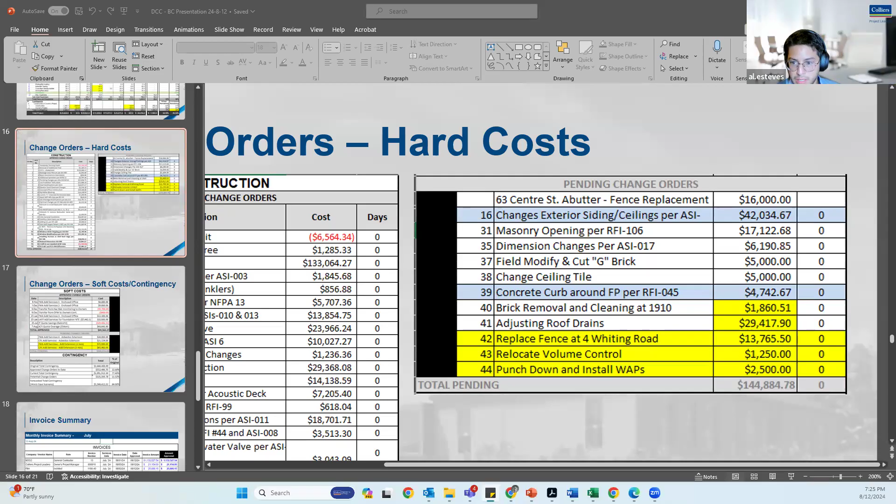So Al, I would price out a 6 or an 8-foot chain link fence. And then whoever makes a decision can decide whether a 6-foot wooden fence, 6-foot chain link, or an 8-foot chain link. That's good feedback, Carl. In a manner not to slow things up, because there's still issues between 4 and the property, as you guys know, the generator and so on. Thanks, Carl. I made a note here, and I know we were looking at reaching out to Doug through the attorneys, and seeing what we can do. I would just get the ball rolling if it was me. So then the town can decide which way they want to go.

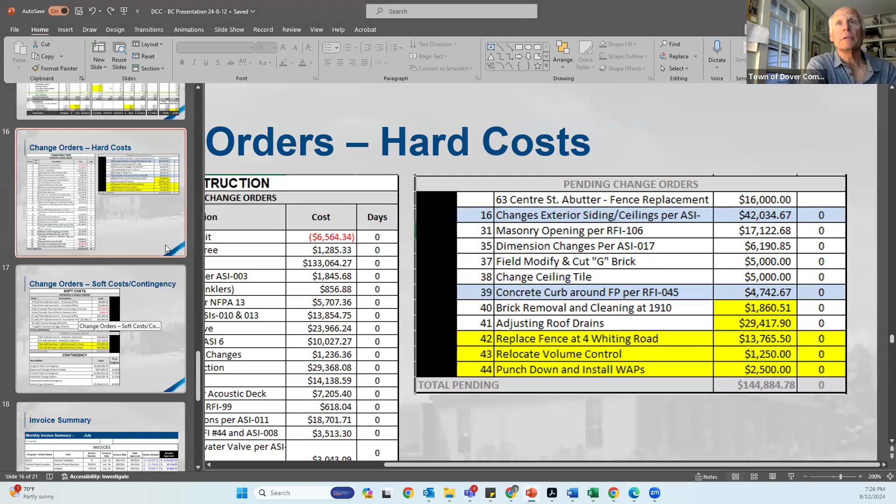Sounds good. Let's see if we can get like an email from the neighbor, give him the options, and get something in writing on what he would prefer. Correct. I just want to make sure, we'll do it, I don't have any issue with it, but let's be sure, in writing, only because legal's involved. Any of the correspondence should go through the town counsel. Yes. I'm just trying to nip things in the bud and get ahead of the schedule instead of being stale. Well, we appreciate that, Carl. Thank you for the info, Carl. Yep.

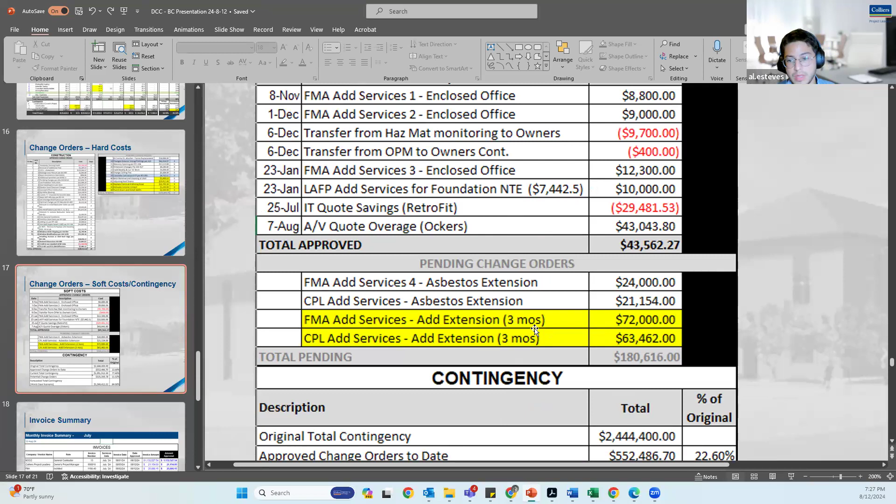Okay, moving on to the soft costs and the contingency. What I did, because of the new schedule that we received from M. O'Connor, I bumped this up from 2 months to 3 months. Obviously, this is worst case scenario. Say the town was on the hook for this, but we know that we're tracking, or we're holding money back, and potentially withholding liquidated damages at the end of the project. So worst case scenario, bump that up to 3 months to align with that.

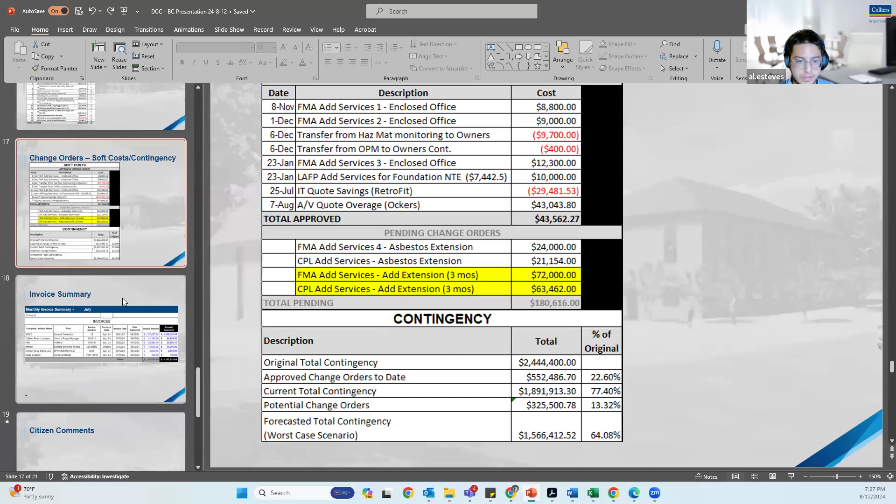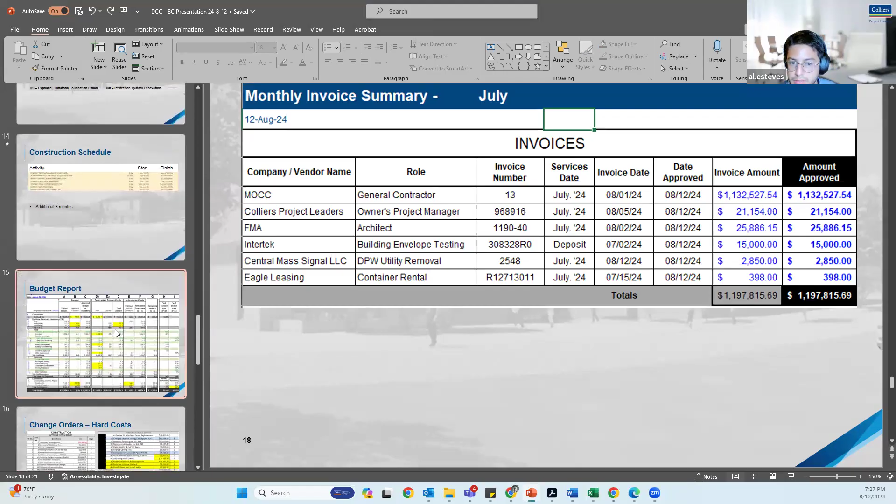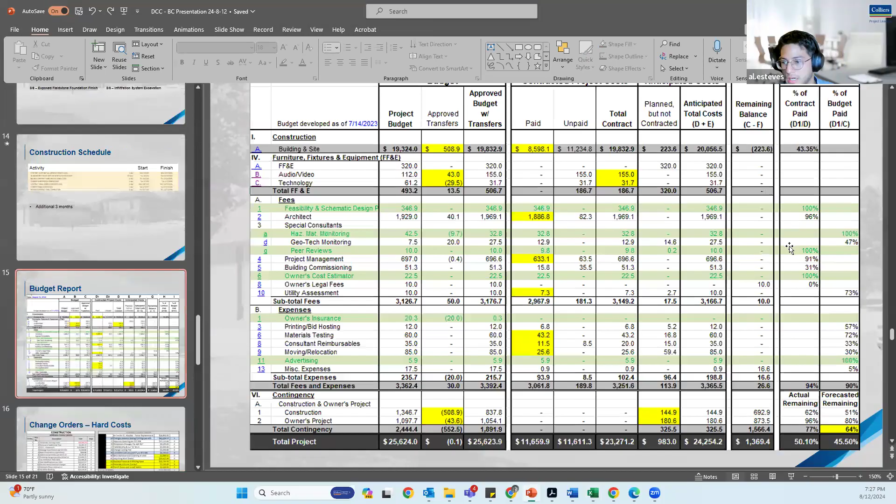So worst case scenario, we're looking at a remaining contingency of 64%. That's for the 3 months, and that's $1.56 million left. Any questions? How much are we done with construction? Oh, based on, yeah. Actually, we can look at that right here. So, that's the invoice. Around 43, built as of the end of July, it's a little bit higher, like 44%. And then the overall project, 45% built.

Yeah, they're saying 46%, but we're holding money. Yeah, right. So we're still in good shape. Looking at the invoices for the month of July, we have M. O'Connor's typical invoice for July. The 1,132,527 represents the reduced amount, so we reduced it by the 88,500. We have Colliers' typical monthly invoice of 21,154. FMA's monthly invoice of 25,886. We also have Intertek deposit. They were approved by the Board of Selectmen, and they require a deposit of $15,000 to start. So that's what that is.

We also have an invoice that I received today. Go ahead, David. No, never mind. Go ahead. DPW, we received an invoice today from DPW. This is to remove the Comcast lines that are on the pole that's getting relocated. Those need to be removed in order for the pole to be relocated, and it was going to be relocated, as I understand it, for the turning radius for the fire trucks to come in and out of that service drive. So that's for $2,850. And then we also have the typical Eagle Leasing monthly invoice of $398. Any questions on these invoices?

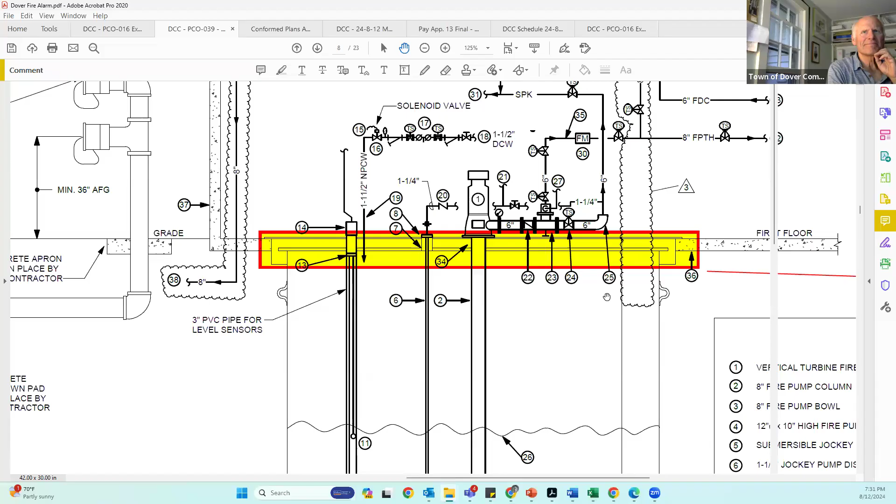I got Saturday off. I can go up on a pole. I'll bring you the ladder. That power's been dead for a long time.

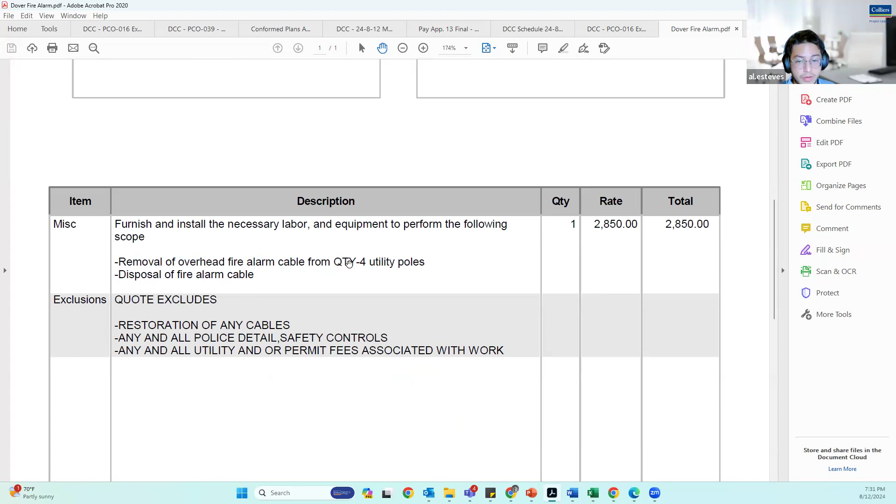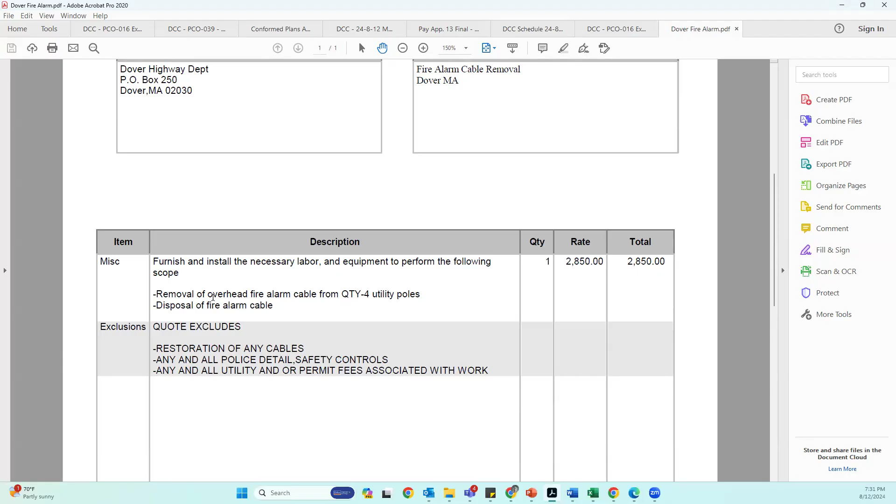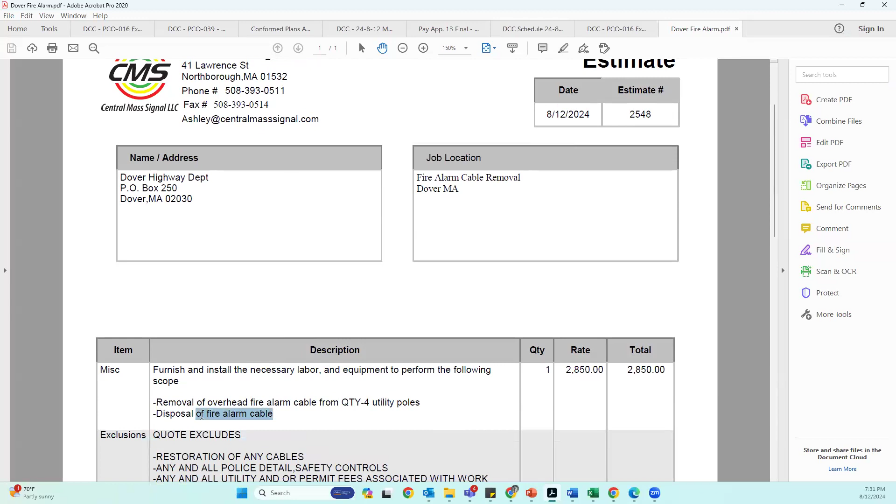So this is the part. They're gonna remove it from 4 utility poles. It's not just that one. Well, the 4 poles, no offense, have nothing to do with the Carroll project, correct? I think one of them at least. So you have a good point. Just the one at the end, the existing exit. I don't know, maybe I'm wrong. Did the town request new poles, or is that done from Verizon, or is that done through Eversource? Well, these guys are just gonna be removing the fire alarm cables. Oh, so you did get a price. He did get a price from his company. 2,850. Okay.

And this is for the Dover Fire Department municipal line. Are they reinstalling the municipal line, or are we just removing it? It was for the external pole boxes on all the town buildings, which we have not used in 15 years, but the wire is still strung. There's still a lot of towns with municipal lines, so most of the time, fire departments are responsible, from what I understand, to maintain that line. Yep.

Anyways, I was just a little surprised at the cost. You can't move the communication lines from Verizon and Comcast until they've been relocated on Springdale. If you're looking at the community center, you'll see a red wire. That's the line that has to be removed. Yep. And there's 4 new poles that were installed on the property perimeter.

Anyways, that's just my take, for what it's worth. I'm not sure we got a choice, though. We still gotta take the line down. No, the line definitely has to come down. I'm not saying that. Yeah, no, I know, I agree with you. $2,800 is a lot of money to get a guy up in a bucket truck for 2 hours. Well, you gotta have a police detail too, at $70 an hour, 4-hour minimum. Yep. Sorry. I'll try to keep my mouth shut for the rest of the night.

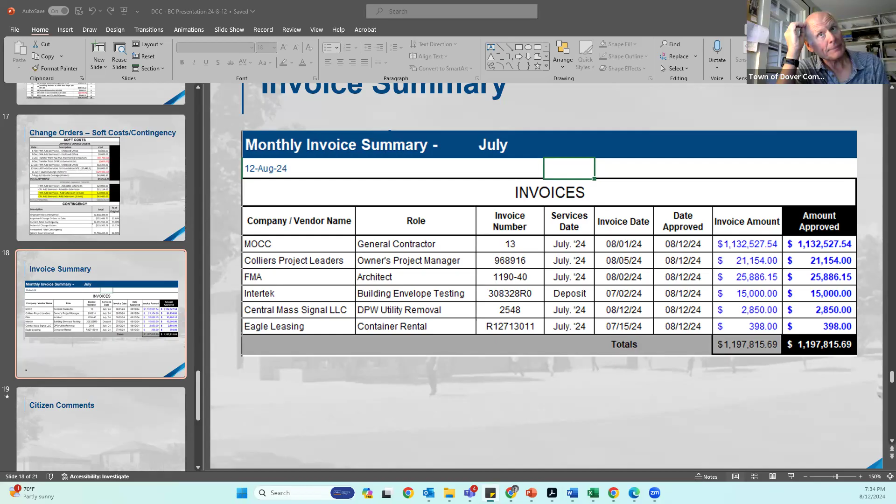All right, any more discussion on the monthly invoices? If not, then I hear a motion to approve the monthly invoices for July per this summary totaling $1,197,815.69. Motion. There's a second. Okay, I'll poll the committee. All those in favor: David Billings, yes. Luciano, yes. Barry, yes. And I am a yes as well.

Okay, that pretty much concludes my presentation. I'm not sure if there's any citizens on the line. Citizen comments, any? I don't think there is anybody on now. That doesn't appear to me as well. Carl, you had mentioned the IT meeting. So just curious, Al, if you could give us a very quick synopsis of the IT meeting on Friday.

Yeah, so we had a really good meeting on site with the electrician, with Retrofit, who's doing the tel data for the project. They already work with the town of Dover. They are familiar with their infrastructure and their standards, as well as Okers, who's the audio and video vendor for the project. We essentially went through the scope of work from all 3 sides, just to make sure that we know who owns what and that we are coordinated. So that was a really good meeting.

We walked the site after the meeting, and as a result, there's potentially a small change order coming up. Neither Retrofit nor the electrician own the hanging of the wireless access point, so there's going to be a small cost for that. Retrofit would have had to outsource the work to yet another company, so we decided it's probably better to keep it in house with Griffin, who are working on a price for that. And there were a couple other miscellaneous items. It's not going to be a big change order; we're waiting on pricing from Griffin, the electrician on the project. But overall, a good meeting. We're in good shape for that scope.